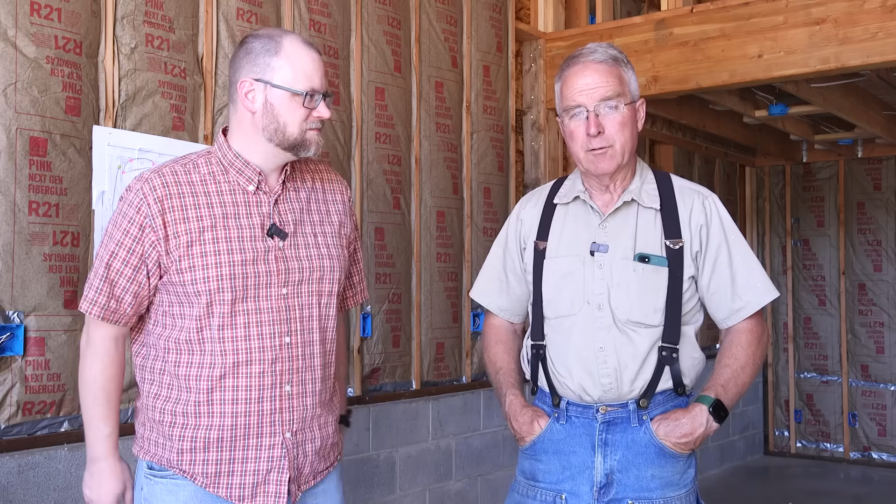So this is a long anticipated and frankly a little bit overdue day, and it's this. I get to interview the world's finest son-in-law. You already met him on the spec house, right? Ben put in the low voltage for Nate and I on that spec house project. And he has been doing the electrical work, both high voltage and low voltage, in his own shop slash office slash garage project we've been working on now for a year.

Now, he's been patient, and I've been patient. We're still speaking to each other, which is not a small accomplishment. And I was frankly thankful that it took Ben 5 months to do the electrical work in here.

I'm going to turn the mic over to him now, and he's going to describe to you his learning curve, how his professional training, and he is now the electrical engineering and computer science online program director for Oregon State. He works remote. He also drives to Corvallis and teaches in person. He's a busy guy, and filling in the cracks in that schedule, he's taken care of everything electrical. He's turned out a nice product at last, and it gave me a nice break when frankly I really needed it. So Ben, talk to the people about what you brought here.

Great, awesome. Well, thanks again. Couldn't have done this without you. Having this dream turn into reality has been a real thrill, and it's why we bought the property. We didn't know that we were gonna have you do it, but the dream from the inception of walking through it involved some sort of building here.

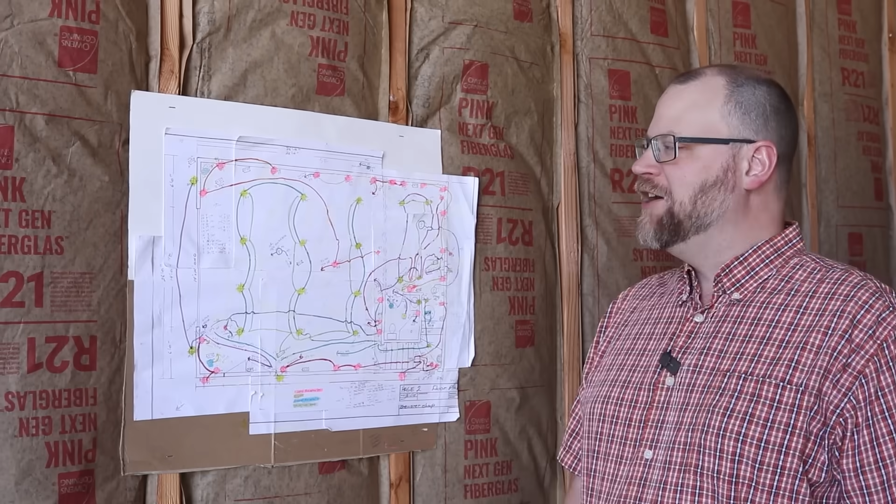And once that was done, I took that design language that he had taught me, the elements of code that were embedded into the design, and went back and added the plugs and the switches and the circuits for where I wanted them to be. So I took his design document and turned it into my own. This was the plan that Kevin had come up with, and it was all in pencil markings. It was wonderfully drawn and rendered. And some of the key features were plugs along the walls and lights in the ceiling. That was key information that I needed.

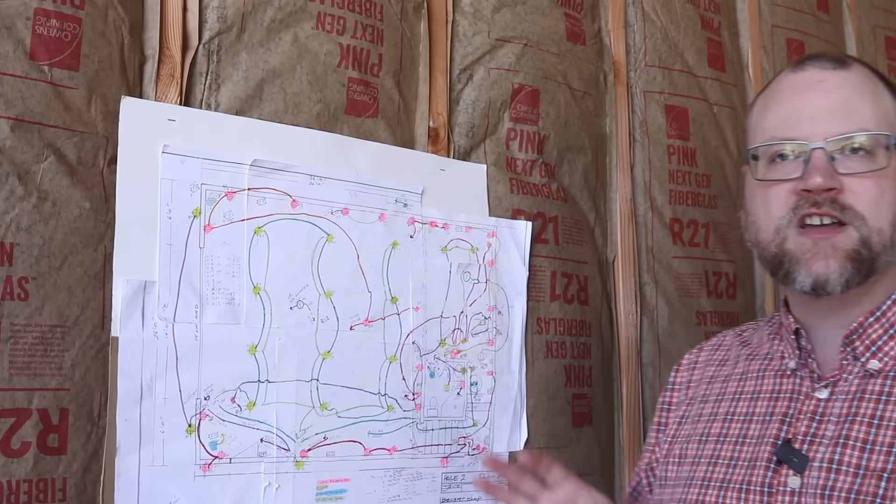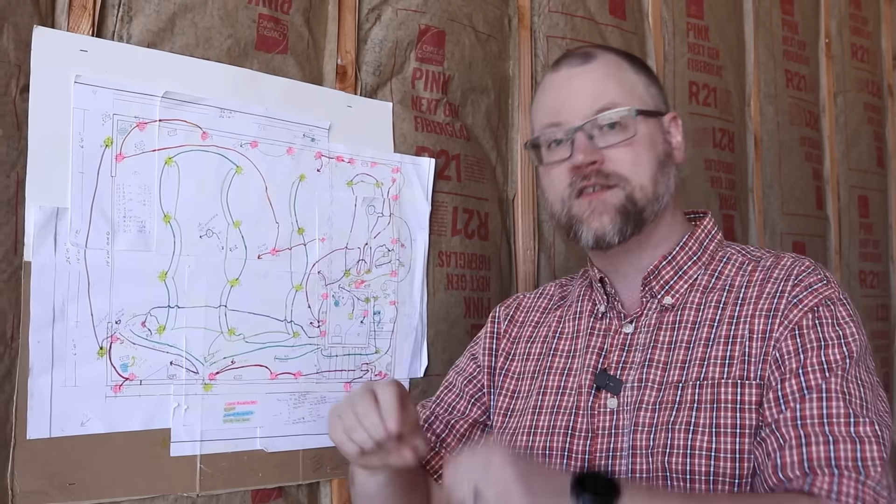I didn't know the symbology. I didn't know the way that the cables connected. Once I understood how he was expecting things to be done and how the inspectors were inspecting things, I could add in the parts I wanted. So I went from the perspective of where do I want plugs first, and what kind of plugs do I want? I was looking at the standard duplex and also the quads. So we got 4 versus 2. I also wanted to add some 240 volt receptacles and then about 1 billion low voltage outlets, or jacks. And we'll go into the low voltage here in a bit.

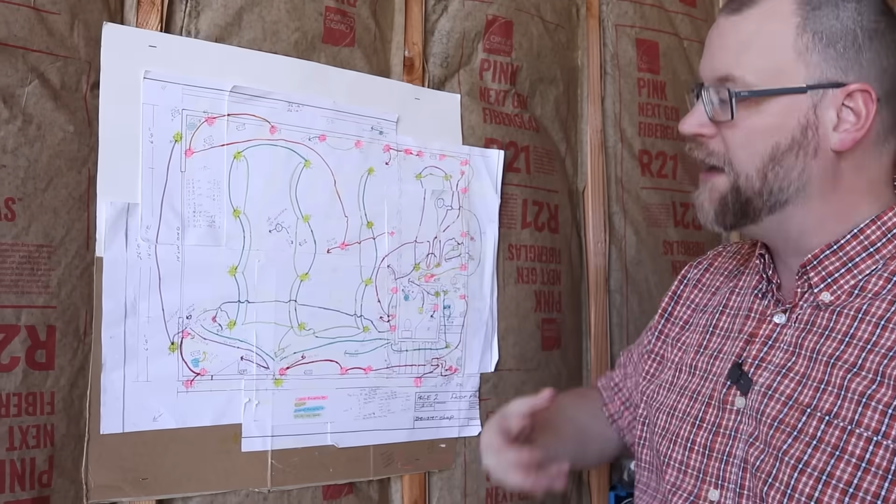So in terms of the lights and plugs, the standard symbology was followed for the quads and for the duplexes. And I colored them all in pink. You can use whatever color you want. I used pink so that I could see it at a glance. For lights, I used the standard circle with a cross symbology and colored them all yellow. And then I colored my 240 volt receptacles in blue. Then I started connecting them together with colored lines so that as I put in these circuits, when I had time, I could work on a specific circuit at a time.

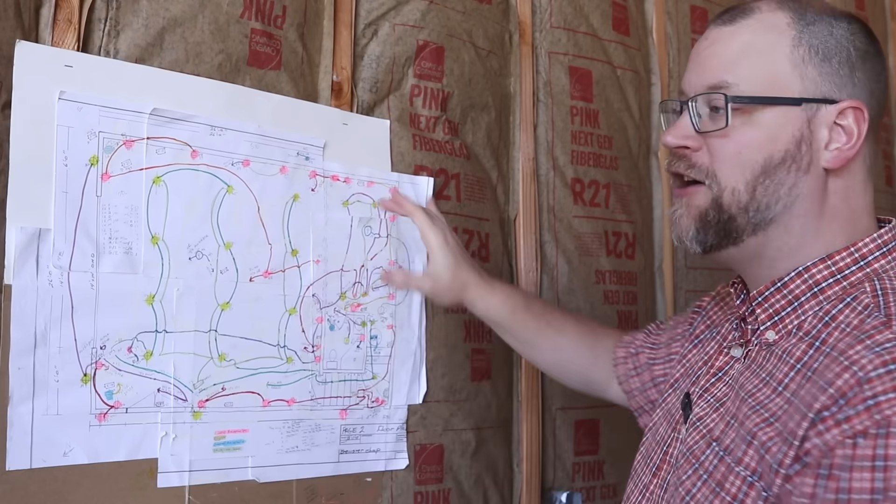So they're all color-coded. As I did that, I built up a little chart that told me the number of circuits that I was adding into the building. Now I know that it's overkill because there's no reason for me to have so many separate circuits along this back wall. It's unlikely that we're going to be running a grinder and a welder and a table saw and a drill press all at the same time.

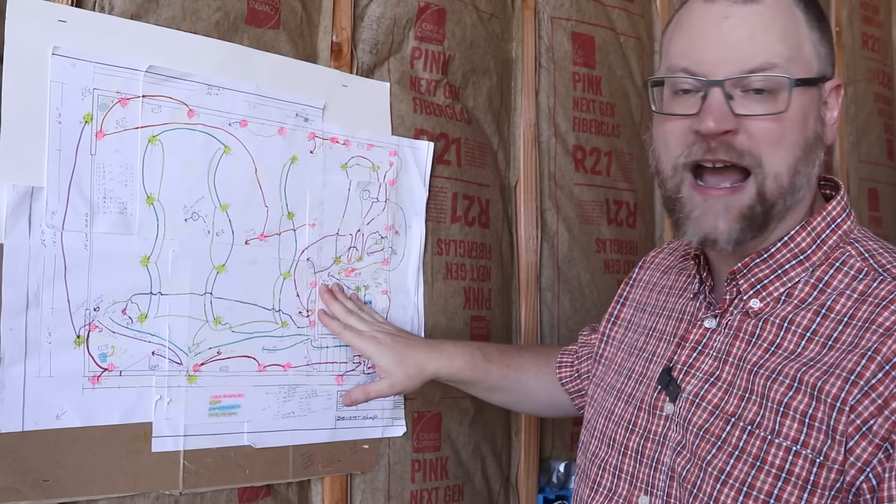But if we wanted to, we could, because overkill, and it's simple to use as a user because I can plug anything in anywhere and know that you've got practically the entire circuit for that one device. All right, I also added in a fan circuit for up above, garage door circuits, there's a heater in the bathroom, water heaters, all that is included.

So I want to stress this was an absolute thrill to do. Not only was I trying to achieve a specific result, but I wanted it to be fun, and it was fun. And I'm kind of sad it's over. I wish there was more electrical work that I could do.

I am not an electrician, and I'm sure all of you tradesmen out there who are seeing what I'm doing, seeing the designs, even the way that I've put the boxes in, I'm sure it'll make you cringe. Certainly this is not necessarily a recommended way to meet code in whatever your jurisdiction is. But I met our code and already passed our inspections and had a blast doing it.

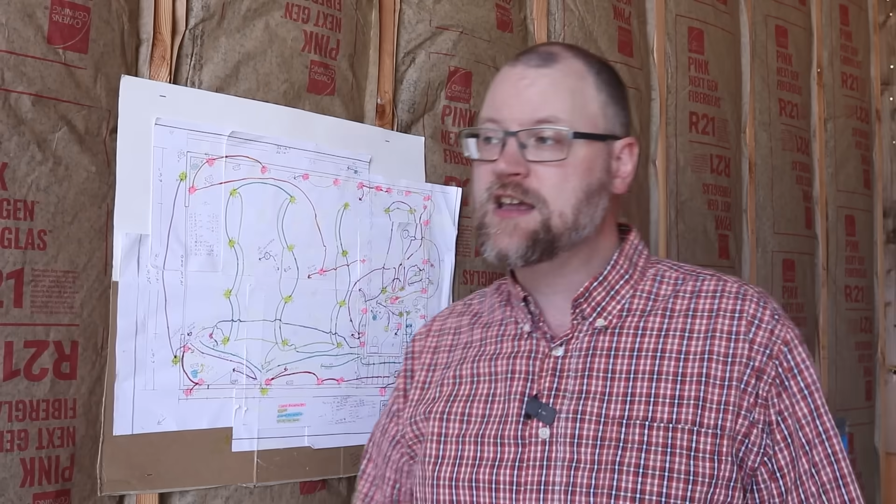For the lights that we put in, I decided to go with big LED panels instead of little cans. The LED panels are cheap, they're bright, I can change the temperature on them. I have lots of overhead ones for the main shop area, lots for my office, and then I added in a dimming system for it. My objective was so that when I turn on the lights, it's so insanely bright that I have to use that dimmer to bring it down to normal levels.

Because sometimes when you're working with very fine tools, you're working on little tiny things, electronics, you do want that high intensity brightness. I understand the difference between work lights and overall light, but I wanted it bright. So overkill on the number of lights that are up above and the number of lumens that are above.

Since I am more on the engineer side than on the electrician side, and I don't necessarily know what I'm doing, I wanted to make sure that the system was testable before we then pulled all the devices back out of the boxes and started putting insulation in to cover up all of the wiring. So a few of the things that I did. For one, I used pigtails on everything. This is just a standard light switch. This one happens to be a three-way light switch.

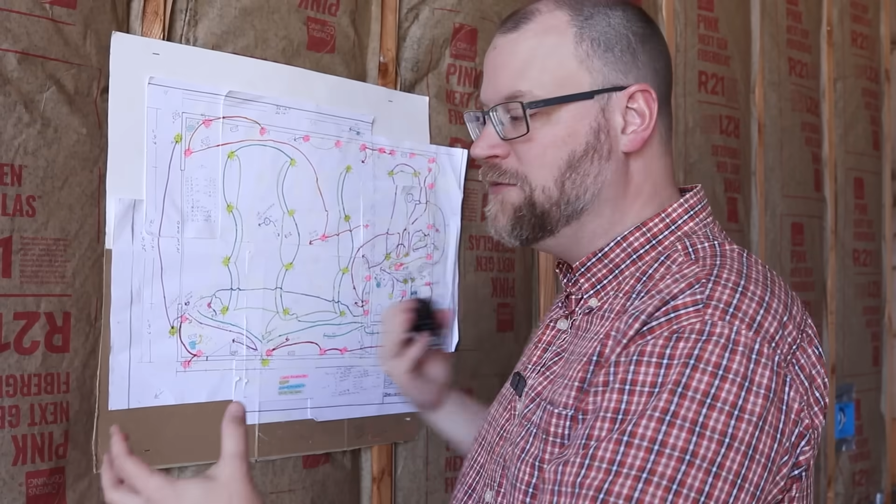And when I put these all in, I made sure to use pigtails on all of these so that I could put the entire system in with all of the devices, test it to make sure it all works, and then just use my little Wago lever locks to disconnect it and pull it out. So it's easy for me to remove, easy for me to add back in once the drywall is all in.

So how do I know where they all go? Every single thing on the design has a label. So every box, every slot, every switch, they all have a specific label. And all of the devices that I used for testing are written. And then inside the box itself, both on the top and on the inside, there is a label that tells me what each one is. This is Foxtrot 1, this is Foxtrot 2.

So let's look at the connector that I used for these. Instead of going with wire nuts, I went with a lever lock connector. These are made by Wago, and the way they work is there's a simple lever that you detach, and then it simply comes off the wire. Easy to put on, easy to do, doesn't require, frankly, a skill in wire nutting that I don't have, and it makes it much easier for me to test with.

It also has a little touch point there. Once things are wired and power is running, you can use a multimeter to test to see if you actually have voltage there without needing to have it be in an unsafe condition where the wires are exposed. So I used these for all of my high voltage wiring in the shop for connecting wires together, with the exception of some of the larger 240 volt devices that needed to be wire nutted. These are only rated up to a certain size wire.

What I want to brag about is when we started this project, he was deathly afraid of heights. If he got over about 6 feet off the ground, it was unmanageable. He couldn't do it. And I insisted, well, actually, yes, you can, and not only can you, but you have to, right? And by the time he was about 2 weeks into this project, not only could he pull himself up the side of a scaffold, but he could get onto the top and he could work up there.

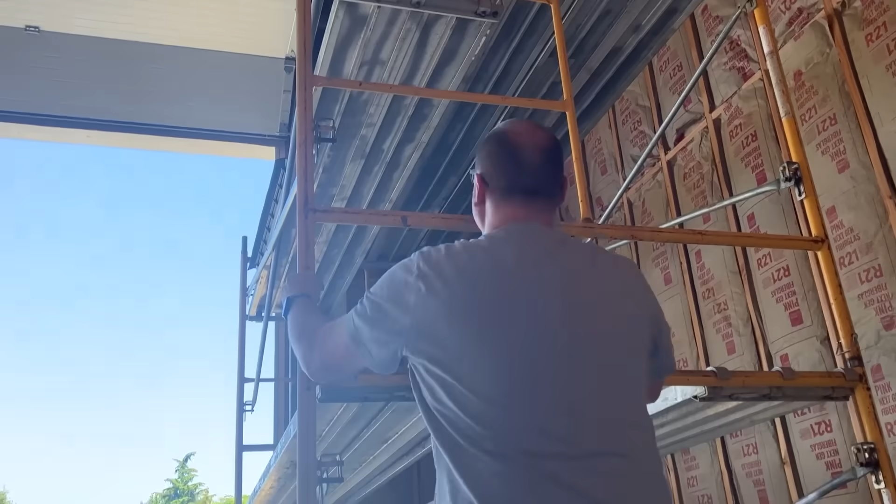And frankly, I'm proud of him because it was a gut level, visceral, survival instinct thing that you had to change a mindset on. Scott set me up with this wonderful scaffold that rolled around here, and I can't recommend that highly enough.

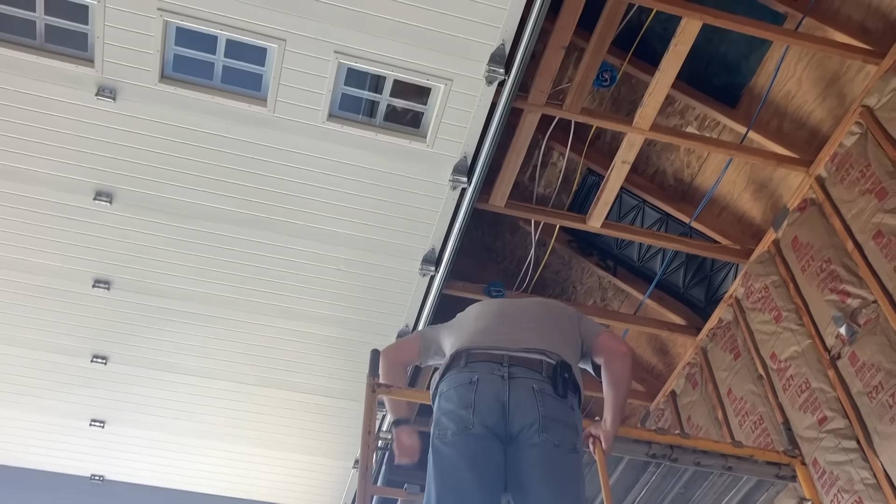Having something you can work on. And when I'd climb up there, I could then push myself around using the ceiling to move around as I did all of the high wires. He wouldn't consider that at first. I mentioned it to him, and I could just see he kind of glazed over and, right, old man, right, I'm going to do

that. But you did. The first time you left me, yes, you had gone and the scaffold was here, and I climbed up it, and I could not get back down. You were stuck. I was stuck, and I sat down on that upper platform and could not get over the fear of needing to move myself, my center of gravity, out back over onto the ladder and go down the side. Couldn't do it.

That transitional action is scary. And one of my kids came in, and I talked with him for a while, me up there, him down below. And then after about half an hour, I realized I can't stay here forever, so I had to make the jump. And after that moment, it became easier. You had to step through that fear with nobody but yourself to do it.

Okay, so can you see how that fits so beautifully into some of the themes of this channel? That sometimes, darn it, you gotta do a hard thing to keep the job moving forward. So, attaboy, Ben, attaboy, man.

Okay, so we have come upstairs now. This is my office. There's a desk on that side, and on this side it's more of a couch and maybe a TV, maybe some filing cabinets, whatever it's going to look like. This is more of an open area. But I wanted to point out where the network cabling is coming in. I have 24 different network jacks built into the building. They're all over the place.

As we move into the future, everything wants an internet jack or some sort of Wi-Fi connection. 2 of these are going to Wi-Fi access points in the building, so there's plenty of super nice Wi-Fi coverage. And then the rest of them are hardwired jacks, especially around my desk area, and they're certainly along every wall, all over the place.

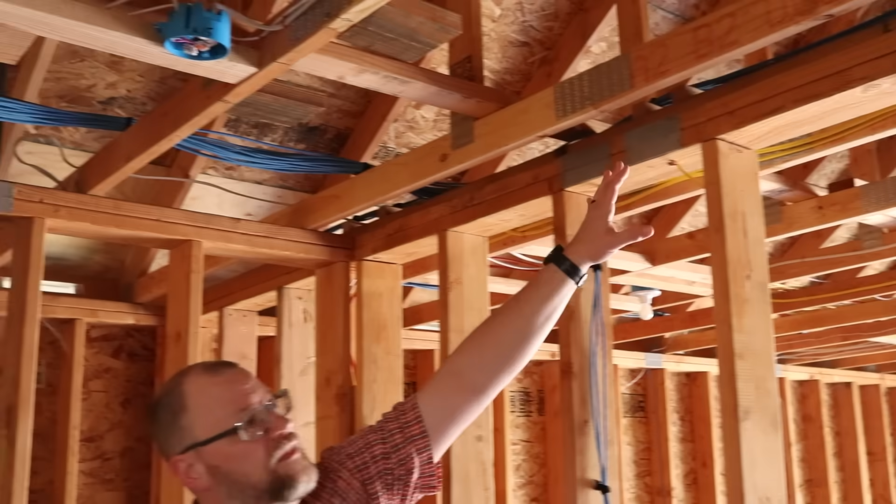They're all put together to come in across these rafters, these joists, and they are all trunked together along this ridge. So I made sure to keep this upper beam, the top of this wall, the top of this crown plate, free of high voltage lines because I knew that was going to be my highway for collecting all of those low voltage lines together. So they all stream through like a river, come down into here, and then stick out the wall where the rack will mount on the other side.

So it's a little strange having this rack be sticking out into space on the other side where that staircase is. The reason I put that over the staircase is that these network racks, holding a bunch of different servers and computers and modems and routers and all that stuff, I wanted on an inside wall for better temperature control, and there's always going to be air conditioning running in here. So this is a nice climate controlled space, and it's not on the outside wall, so it's protected from swings.

And also having it on this inside wall that is exposed on all these sides means there's no insulation in here, so it's really easy for me to work with. Additionally, all of these devices have fans that are running, and I didn't want them over on my side of the world next to where I work, because it's a lot of fans, so they're stuck around the corner here in their own area. So that's why this is here.

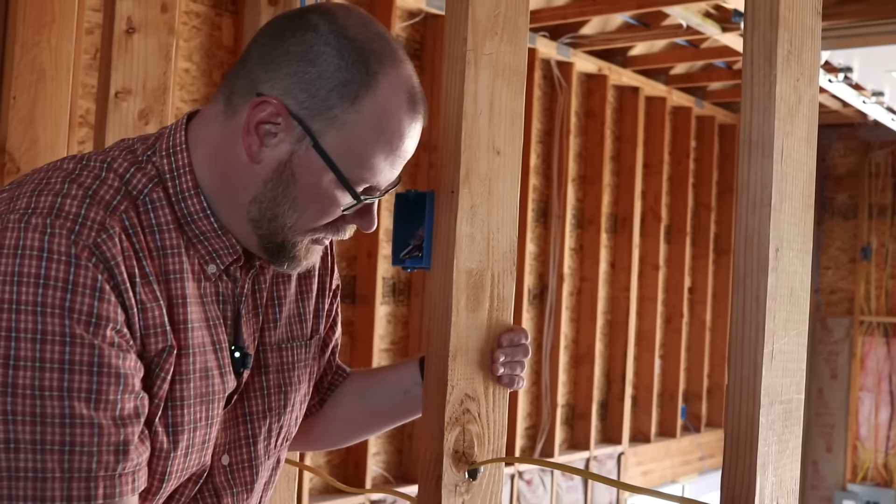So what I have been using are these little metal sleeves. They have 2 little prongs on the outsides, and they hammer into a hole that you drill, and then they protect it on all sides from nails. These are handy so that I don't have to put nail plates on both sides. Since it's protected on all sides, I just drill a hole, hammer the thing in, and now no matter where you drill in from and from what angle, it's going to be protected. So I've really enjoyed these things. These particular ones are Southwire brand.

Before we wrap it up, I'd like to show you my 3 favorite tools that I picked up for doing this job.

3 tools that I did not know how to complete the job without. First of all is this one. This is a Milwaukee cable stapler, and I started with the traditional hand-powered high voltage cable stapler, and I lack the strength to be able to get that thing to work when you're up above trying to staple sideways into a joist up above your head. I couldn't get it to work, and it was frequent that the staples would not go in far enough, or only one of the legs would go in.

Buying this was a bit of a splurge. It cost like $200, $250. The staples aren't exactly cheap, although they're certainly not that expensive. But what it really represents was the ability to finish the job. Without this, without being able to press up against the wood and bam, shoot a staple in and be done, I couldn't have finished. There are 1,400 staples in this building at least.

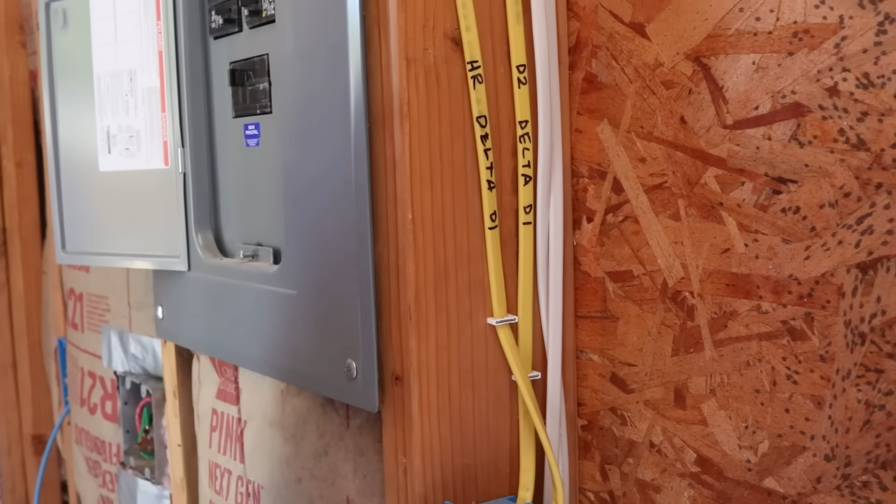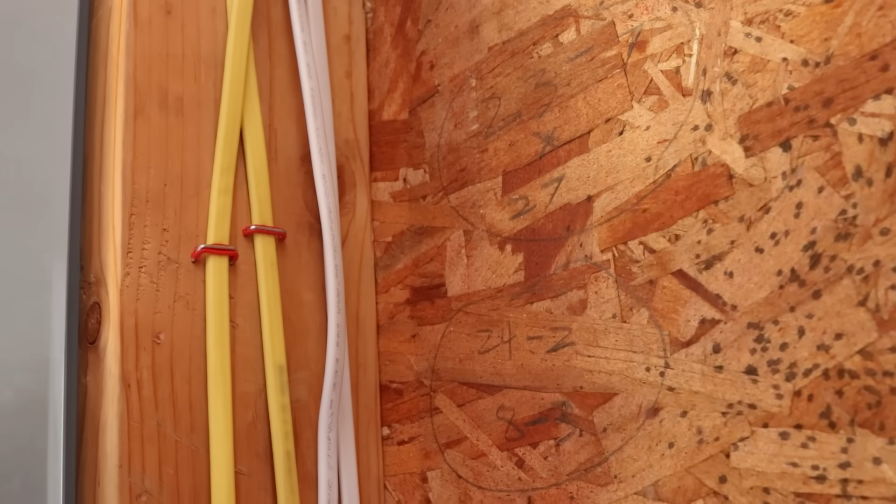I went through about 2.5 boxes of the staples, and you can see some right here. Here you can see some of the old school staples that worked. These were some of the few that survived, but the rest of them are these red Milwaukee staples that are just one touch, bam, bam, bam. This is by far the way for me, this was the only way to finish.

I also wanted to point out, I labeled all of my wires. So as I was doing, not only were the boxes labeled, but the wires are all labeled with home runs and which devices they're going between.

The next one is this cable stripper. So there's lots of different strippers for removing the sheathing around these wires, but I found that it was a real pain to do. This one allows you to go into either a 14-2 or a 12-2 and remove the entire sheath at once. So you can see that it closes down on either of those two and strips the whole thing off. I don't know how I'd have done it at the rate that I was going without this tool.

And this one I've completely used up. It's all sprung, and I don't fault the tool. It got used real hard by somebody that barely knows what they're doing. So next time I do this project, I'll go out and buy a fresh one.

The last tool, when this wouldn't work, was this old school stripper. It has a little hook with a knife on it that you can put on any width cable and run it down to open up that cable. So this worked on a lot of the oddball cable sizes that are around here. So these two were necessary for the cable stripping, and that stapler was necessary to attach them to the wall.

So this whole sort of phase of the construction of this little shop illustrates something that's really important for a lot of us, and that is identifying what your strengths are, identifying what your interests are, identifying what your resources are that can compensate for your weaknesses, so that you can actually put in some sweat equity. And that's what Ben did here. It's sweat equity, the work that you can do on your own projects that save you from having to shell out money.